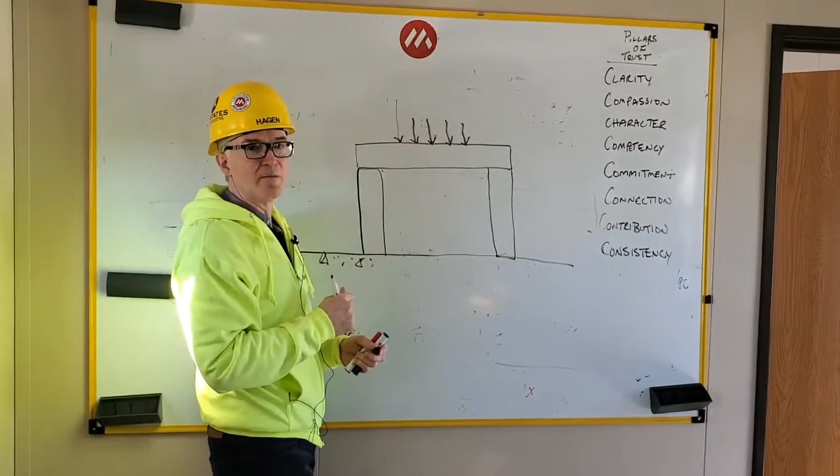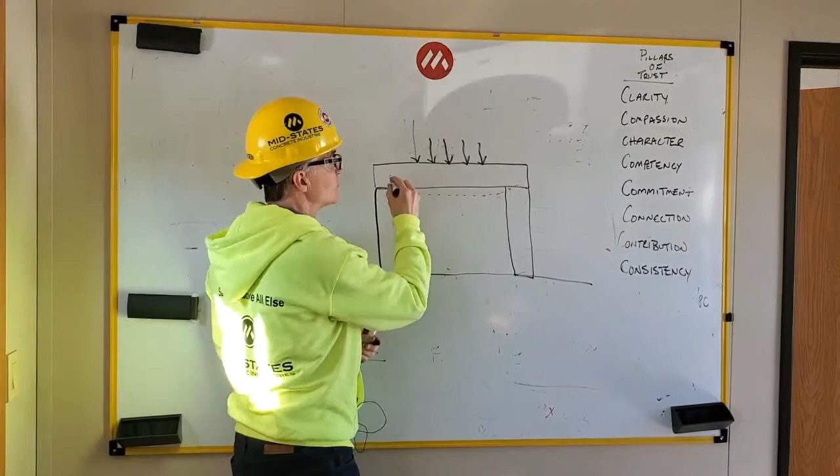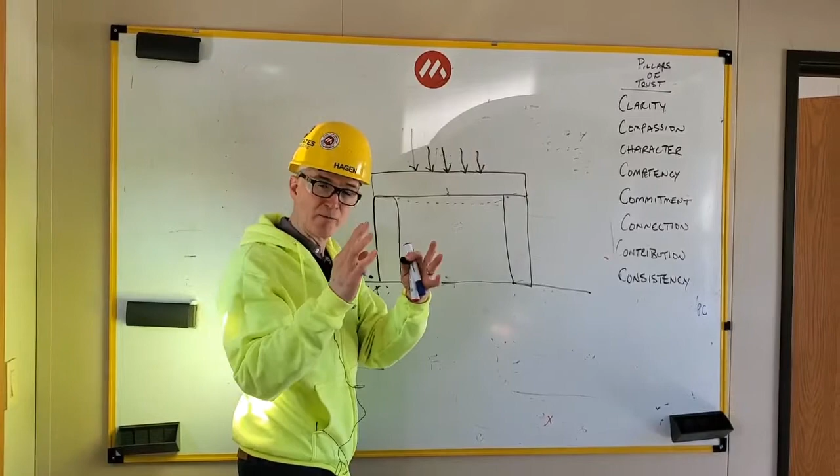Okay, we're at the whiteboard. Two columns and a beam. Superimposed load on the beam. If you recall from our previous discussions with our engineers, we know that this beam, when it's loaded, wants to do this. It wants to deflect a little bit. And if this were just made of concrete, the whole thing would start to crack here. And we wouldn't want that. Concrete cracks, as you recall, in tension. It's really good in compression, but not in tension. So it's going to want to try to crack like this as we load it.

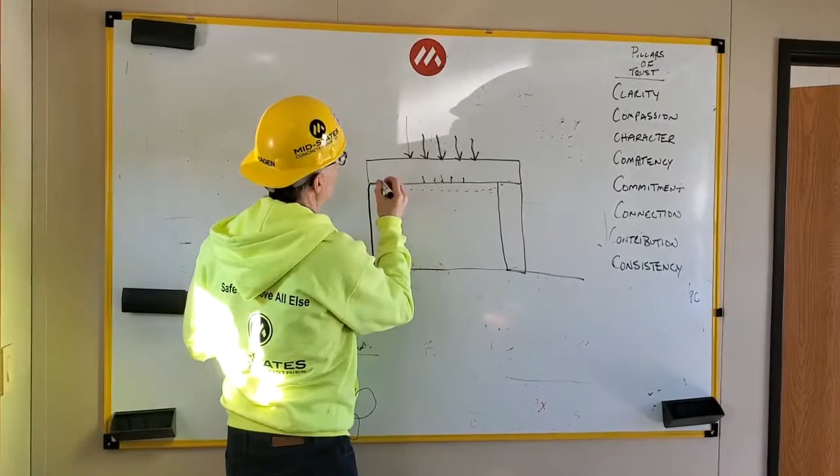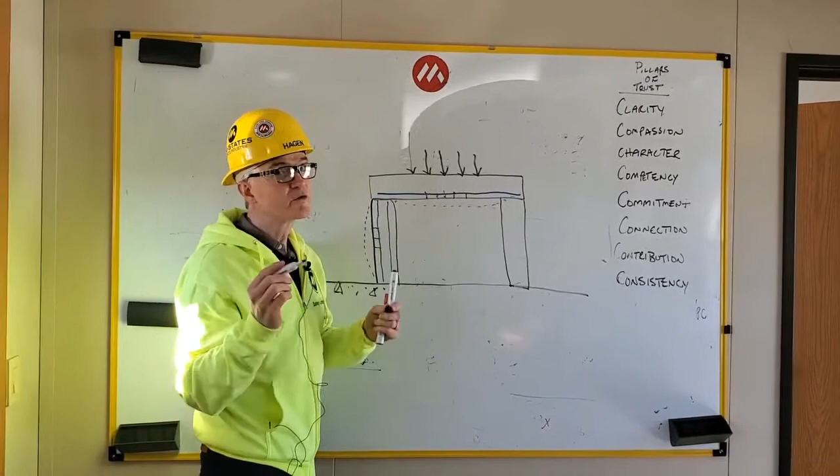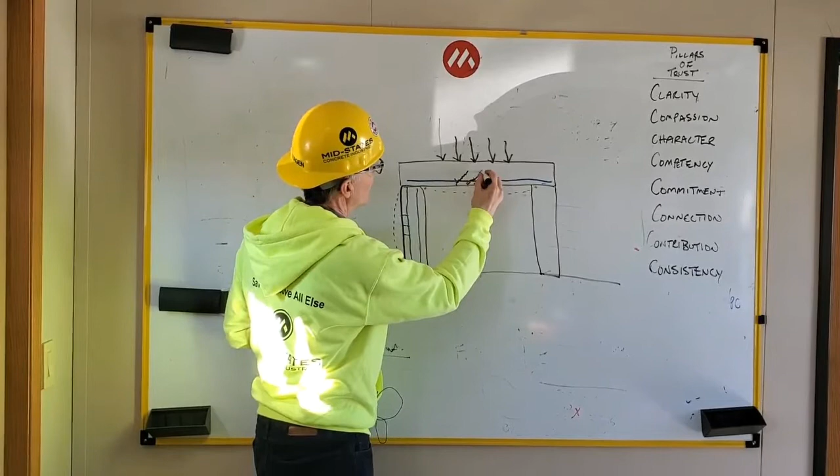But what we do to prevent that is we add in this steel reinforcing in the bottom of the beam so that when that crack starts to happen and it hits the steel, being really good in tension, it stops the crack. Now, if all we did was put this longitudinal bar in, we would still have a problem, because eventually these cracks start to develop at a 45-degree angle, and they would go all the way through like this, and you'd still have cracking concern and failure concern.

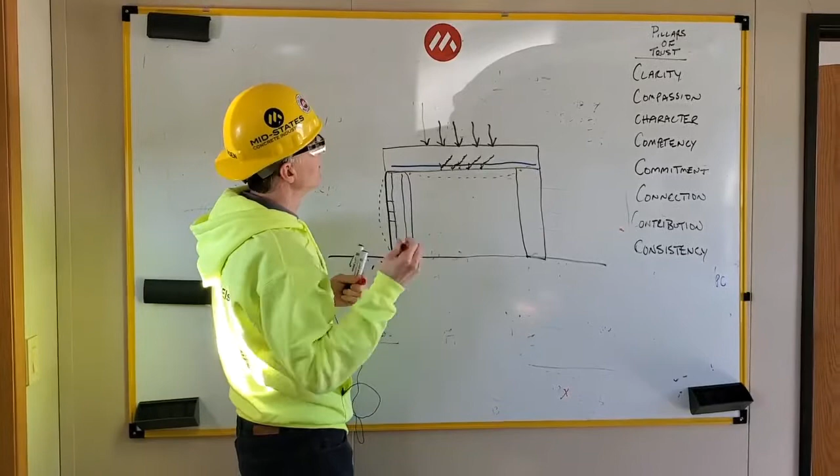So what we do is we add what we call stirrups, and these stirrups are vertical rebar reinforcing, and these stirrups prevent those 45-degree cracks from happening.

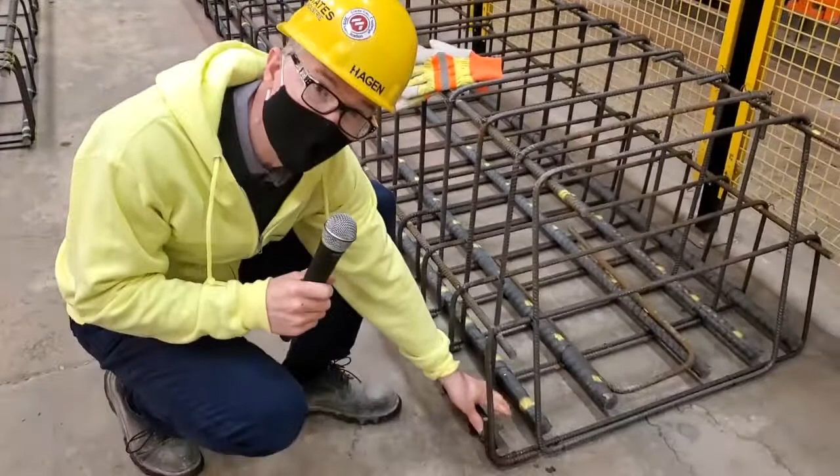We're out in the plant, and we're looking now at a beam cage. So here's the longitudinal bar. These are the big longitudinal bars that I was talking about. That was the blue color that supports the load in bending when the beam wants to bend. These are the stirrups, okay? And these rebar stirrups are the ones that prevent that crack from wanting to go at a 45-degree angle through the piece.

All right, so special guest today, Dr. Matt Phillips. Doctor, how are you this morning? I'm good, thank you. All right, so Matt, how long have you been with Mid-States? April will be 16 years. 16 years. You think he knows something about precast?

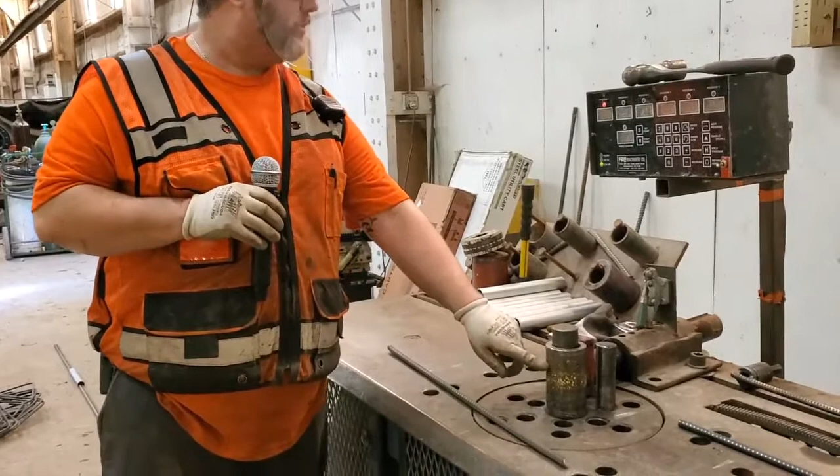So Matt's going to show us a piece of equipment we call a bender. All right, so for instance here we've got a number 4 bar. Your number 4 bar is your yellow sleeve. So what you do is you take your dimensions. If you want a 6-inch leg, you'll measure your 6 inches, put it at that dimension, and then program the machine to whatever radius you want to bend. So you're at 465, you want to hit your counterclockwise, program 1.

You can do multiple bars. So you measure your 6 inches, whatever dimension you want, step on your button, and it'll bend exactly what you want for a degree. So that's a 6-inch bend at that 465. Matt, that's fantastic. Thank you so much.

So this takes some time, and now we've got this new piece of equipment we're going to show our audience. What's it meant to have the larger automated rebar bending piece of equipment around? It's definitely more efficient. Everything's there. You just program it and you go. It's not that you have to cut any bars. Everything here is manual. Like I said, we ran this for many, many years, and that is definitely a huge investment for the company. Matt, front and center here, standing in front of our new automated rebar bender.

And the rebar bender came all the way from Italy. How is your Italian? Not good at all. No? So I'm good at eating Italian food, but that's it. So am I.

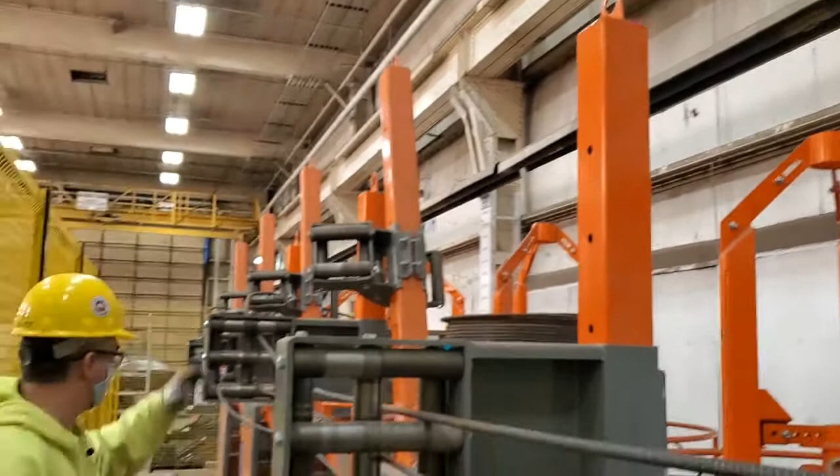This thing is big. Yes. It's got 4 spindles. You could actually do more if you wanted to, so you could keep expanding down if you needed to. So when you say a spindle, let's take a look at the spindle. Sure. You'll see 4 individual spindles. Here's 1, and then 2, 3, 4. So each spindle has a coil of rebar of different sizes. We can actually bend 2 pieces at the same time. We don't do that currently, but in the future, if we needed to, we could.

That's actually being pulled and drawn off of a coil. Yes, a huge coil of bar, and it goes through the machine, straightens it, and then bends it to the proper specification. Wow, fantastic. How difficult was it to program and to get in sync with what we're doing? I made it to where we can actually take our drawings, look at the listings of the drawings, and then send those directly to the bender so they don't have to enter any measurements. That prevents human error from entering the wrong amount.

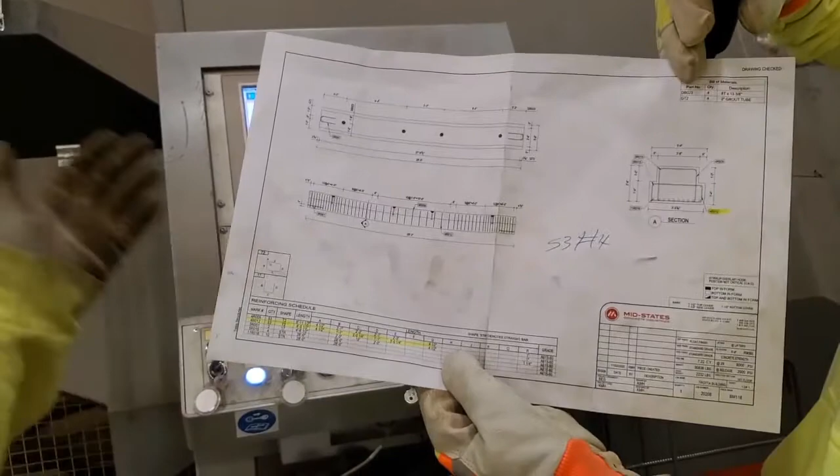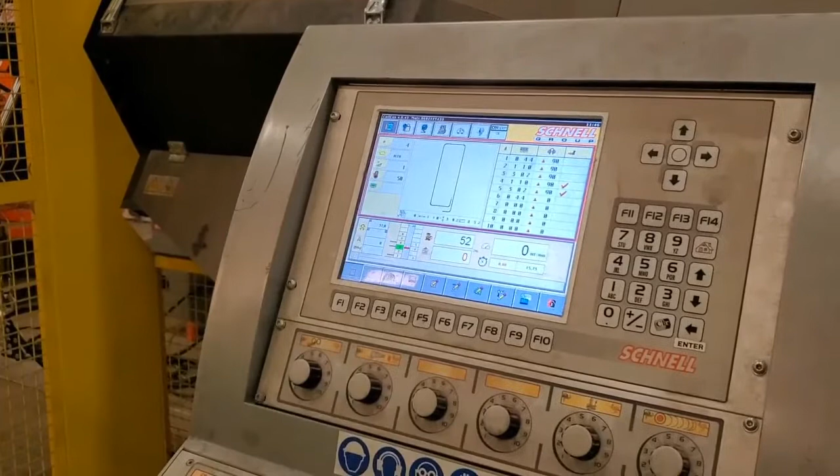A good example of what just happened is an employee just came up to me and said, this highlighted piece right here, we don't have anymore. So he needs 53 of them now. I've already gone through and plugged it into the system. I've already made one, so now I only need 52 of them. So I'm just going to go ahead and run the machine.

52 of these on the old granddaddy might take an entire day. Correct. We're going to do these 52 in like what, 10 minutes? 20? Yeah, 20 minutes probably. Matt, thank you very much.